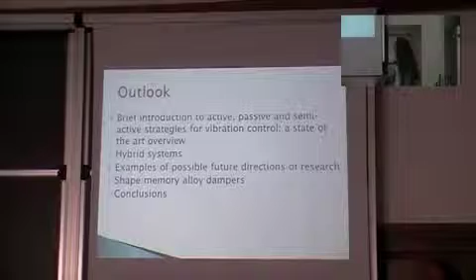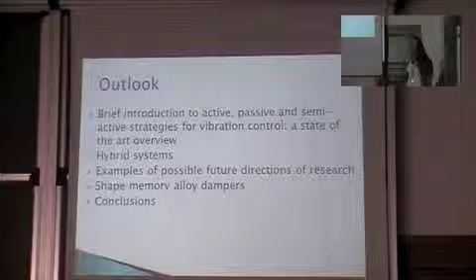Today's talk will be about recent studies of structural control of civil engineering structures. I conceived this lecture for a public from a wide background, so in 2 hours I didn't want to cover the entire state of the art on structural control, but rather focus on what the international community nowadays thinks are the most promising technologies for future developments. We'll start with a brief introduction distinguishing passive from active, semi-active and hybrid control, and among the literature we will select those which we think are more promising for development. We will emphasize the necessity of further studies in hybrid systems, which seem to combine the advantages and overcome the limitations of all the other types of structural control.

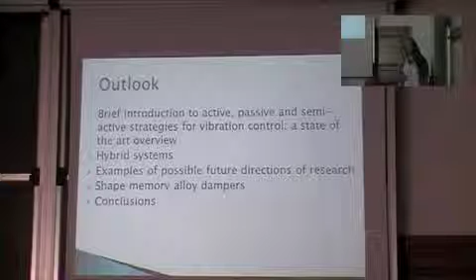My own background comes from material science, shape memory alloys. So I would devote particular attention toward the end, maybe in the second half of the talk, to introduce the topic of shape memory alloys. And we will end up with conclusions.

Given that vibration mitigation is a very broad topic which interests a lot of fields in engineering, we would like to stress the necessity to treat structural control for civil engineering apart from other disciplines, although we need to make the best out of the experience in other fields.

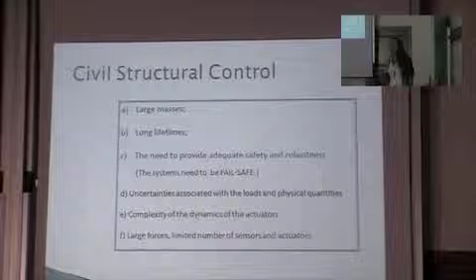The boundary conditions we need to deal with are quite peculiar, because we are dealing with very, very large masses, long lifetimes that are not comparable with the ones of structural control devices, which require a maintenance plan. We need to provide, in any case and any scenario, robustness and safety to our structures, which means that during maintenance the structures still need to be fail-safe — if one of these devices is out of order, we still need to rely on the robustness of the structure itself.

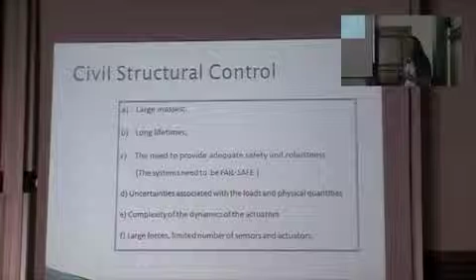Also, other concerns come from the lots of uncertainties that affect the loading condition and the physical quantities, which can be due, for example, to material damage and the state of the structure itself. Also, the dynamics of the actuators and its interaction with the structure is of concern, because there's always a delay between what comes from the actuator and what actually is received by the structure. This is still a problem to be discussed.

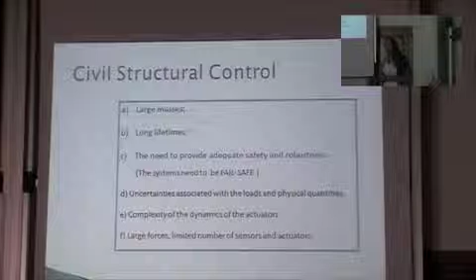Also, the location and limited number of sensors and actuators are a limitation due to the need of large forces. In the end, the baseline concept of civil structures is that they were conceived as passive structures, in the sense they are not adaptable, so we make design assumptions without actually knowing which ones are going to be the loads. So the intent here is to add devices to the structure, to change the structural configuration, the structural properties, in order to have a better response through the addition of devices.

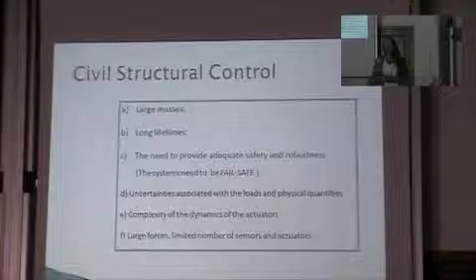Devices can be of different types, and they can be active if we are actually exerting a force, a control force, on the structure — which however has the big drawback that it needs external power. When exceptional loads occur, the first thing we do is run out of current. So we need to make up for this.

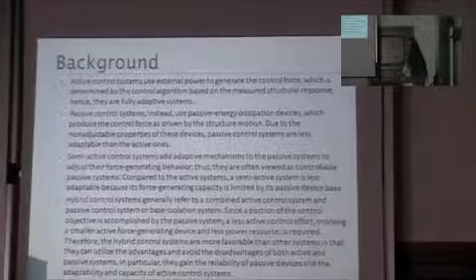Passive control instead uses energy dissipation devices which produce the control force as driven by the structure motion, so of course they're less adaptable. A good compromise is the semi-active control system, which is receiving a lot of attention lately. What they actually do is make passive devices adaptable, tuning the properties of the design device to make up for the recorded response. Finally, hybrid control is a step forward from semi-active because it combines both active and passive control systems, or base isolation.

The portion of control is accomplished by the passive system, so that we can always rely on that even if there is no power. It seems to be a promising way to merge the advantages of both worlds and overcome their limitations.

From a mathematical point of view, starting from the basic example of a single degree of freedom system, the structure is described by the equation of motion, and here we are assuming as the external force the ground acceleration due to earthquake. In general, this can be extended to any extraordinary loads during the structure's lifetime.

When the structure is controlled by a passive system, the passive system changes the structural response by adding a term, gamma x, which can take different forms - linear, integral, or differential. What makes this system passive is that this is decided by the designer and cannot be changed.

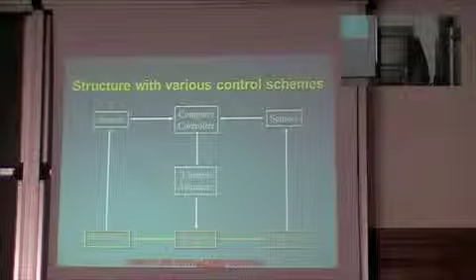So the problem of active control is an optimization problem, because we need to find the compromise between a better response and the cost of the active control device in terms of power and capabilities.

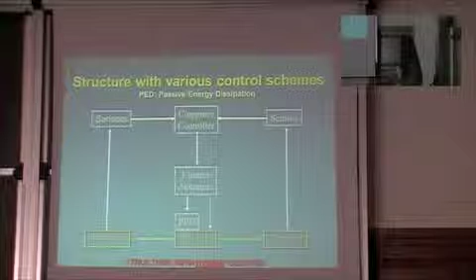The difference between what we call active control and hybrid control is that hybrid control also relies on passive devices. Passive devices that are integrated into the structure, changing its configuration, so that if the control actuators are not functioning, we can still rely on the passive part.

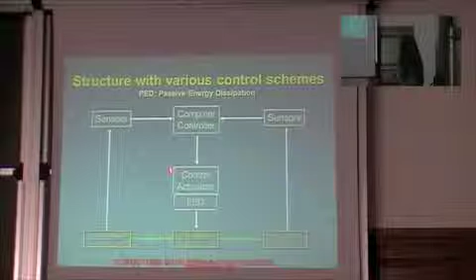What is the difference with the semi-active solution? The semi-active solution is when the passive energy dissipator is integrated in the controller and not into the structure. This is because the controller is used to tune the properties of the passive device in order to make it adaptive.

The passive device can also be an isolation system.

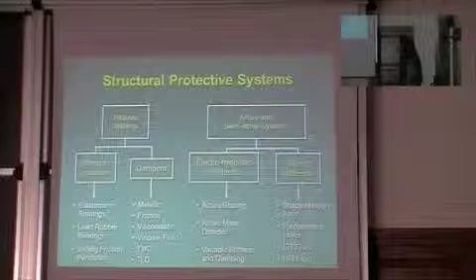To conclude this brief introduction, we have a summary of the protective systems that are nowadays in use in civil engineering. And if we want to also have a regional discussion of their use, unfortunately we have to establish that in Italy the only one that is mostly used is seismic isolation.

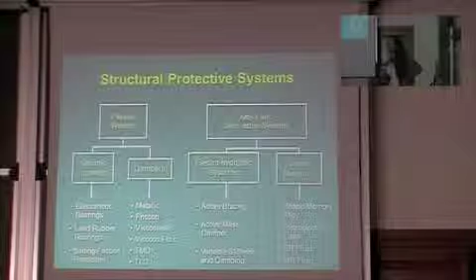Now, seismic isolation is passive and has the drawback that it is targeted only to the earthquake action. We want the structure to be adaptable to any kind of loads, but seismic isolation works only for earthquakes. Not only that, if you have to do seismic isolation on an existing structure, this is very expensive - you need excavation. It's effective though, because experience shows that after an earthquake, seismic isolation for structures worked well.

The other passive systems include dampers, which can work on different principles in order to dissipate energies. They can be metallic, friction, viscoelastic, or fluid dampers.

Among the active and semi-active solutions, we distinguish the purely active ones, based for example on active mass dampers, to smart materials, which are more in the semi-active area because they are materials with functional properties that can be tunable through providing electricity.

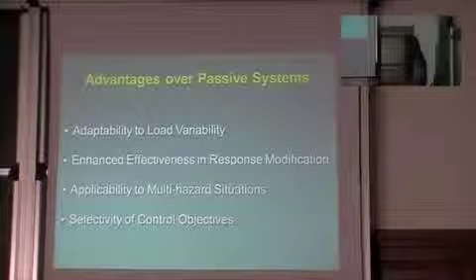The hybrid system is a combination of both the passive world and the semi-active or active one. It has the advantages of lower power requirement and potentially being fail-safe, whereas passive structural devices are more reliable but cannot adapt, while active systems rely on too large power inputs. So the advantages of hybrid systems over passive ones are adaptability, enhancing effectiveness in response modification, applicability to multi-hazards, not only earthquakes, and selectivity of the control objective.

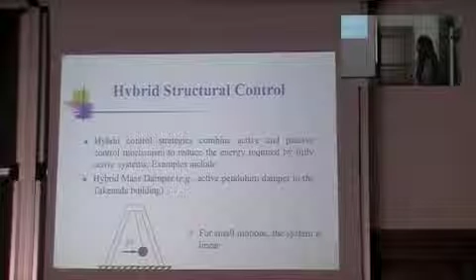Here are some examples from literature of hybrid systems, actually being implemented in real buildings in Japan. In terms of diffusion, in Italy we only have seismic isolation, or at most seismically isolated structures. But in Japan, actively protected buildings are of common use.

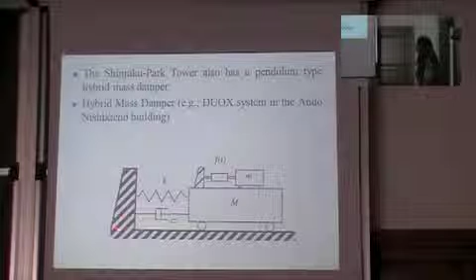This, for example, is a hybrid active pendulum in which the control force is used to drive the motion of the pendulum. Here is another hybrid system with a duox system, where we have an AMD on top of a passive element.

Another innovative device now being studied a lot is the so-called active isolator, in which you combine seismic isolation with some kind of active or semi-active dampers. Those are examples from the past.

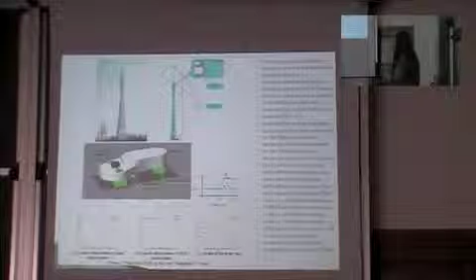A more recent one is the TV tower recently built in China, in Guangzhou, where a hybrid system was implemented. This is in a region very prone to typhoons, strong winds, so they equipped both the structure and the antenna with two different isolation systems based on hybrid control.

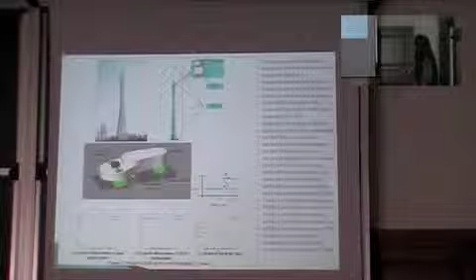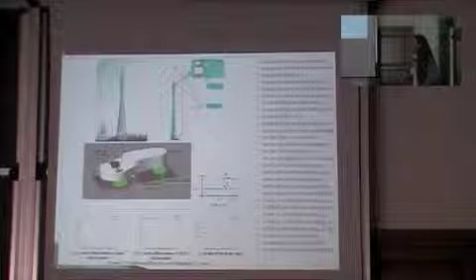This combines tuned mass dampers, which are columns full of liquid, but these have a limited stroke. This stroke enables the TMD devices to be reactive only to limited, weak wind velocities, low wind velocity. When there is a typhoon or stronger wind velocity, the active part of the structure comes along and provides for the missing capacity.

The problem with this solution, though - why is hybrid better? Because when there is loss of power, the actuators do not work. So in past earthquakes, in the Kobe earthquake, the actuators did not activate. And so we have to combine this with a passive solution.

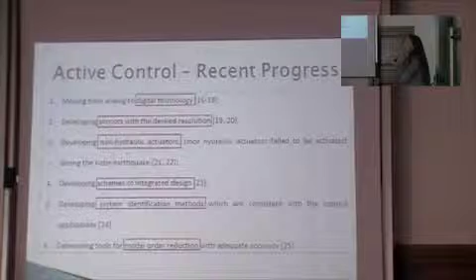We also had more studies pursuing integrated design between the devices and the structures, and system identification methods which need to work in large deformation, because active control, since it's expensive in terms of maintenance and power, needs to be activated only as the last resort, only when the earthquake strikes and we are in large displacement. So we need system identification methods that work for highly nonlinear structures, as we will see in a moment. Then there's also a need to develop model order reduction techniques for complex structural systems.

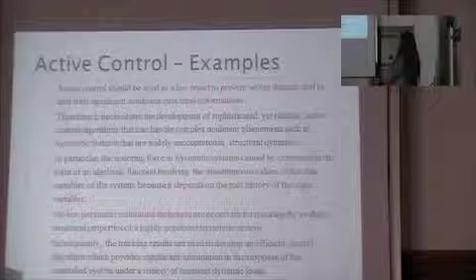So, an example of system identification technique that is realistically applicable during an emergency - we say it's the last resort during significant nonlinear deformation. During this deformation, the system usually shows highly nonlinear, hysteretic behavior. Hysteretic means that the restoring force is dependent on the past history of the state variables.

We need an online parameter estimation technique which tracks the evolving structural properties, and as output of this tracking technique we calculate the controlling force through an efficient control algorithm.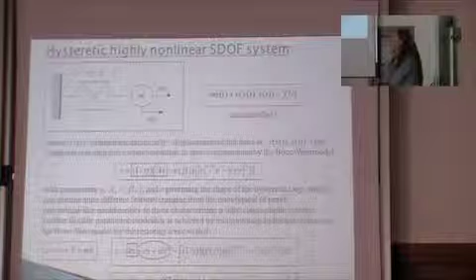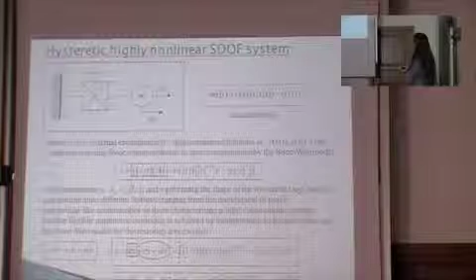If we want our model to become even more flexible and include larger classes of hysteretic systems, we can add to the restoring force, which we now call zeta, equal to r, given from the equation of motion by f minus m times the acceleration. We add to the terms that come from the integration in time of the Bouc-Wen model two other terms: one proportional to the velocity, and another proportional to the cube of the position.

So we introduce two further parameters to be identified. The objective of our tracking solution in time is to identify the vector of unknown parameters that describes our restoring force model.

We take the derivative in time, and we have the dependencies on the factor k, c, d. One notes that k came from the previous expression of the Bouc-Wen model because it just takes the place of 1 over eta times a, divided by a, so it's not a further parameter, whereas c and d are the newly introduced ones. Then we have the cluster of the remaining parameters and the exponent n.

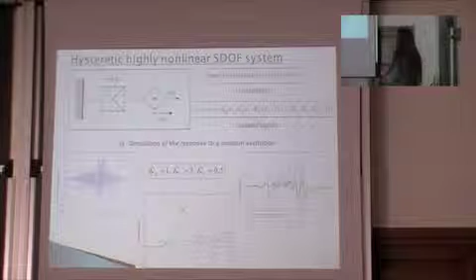Now we move from the academic case to the one that is more realistic, a random excitation, which could be representative of an earthquake or also ambient vibration. And in this case, the solution of the tracking parameters algorithms converge within the first 15 seconds of the excitation. And here we compare once again the response without the control force in blue, and the green one is when we activate the controller. So here was just to have an idea of the software, of the control law that we need in practical application.

But control is a multidisciplinary sector in which you also have to look at the hardware. And nowadays, as we were trying to summarize before, studies led to the development of wireless technology, which is very convenient in terms of installation and also, why not, sometimes also on performance.

But our controller needs to remain the same reliability as before. So we need to update our control system to give us the same results that we had when cables were utilized. So we did design this wireless sensing unit in this spirit.

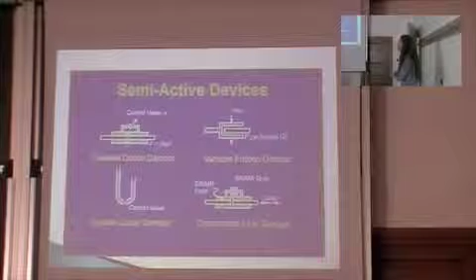Okay, so this is for active control. Let's move over to semi-active devices. Semi-active devices are receiving a lot of attention because, as we said, active control proved not to be reliable alone during earthquakes.

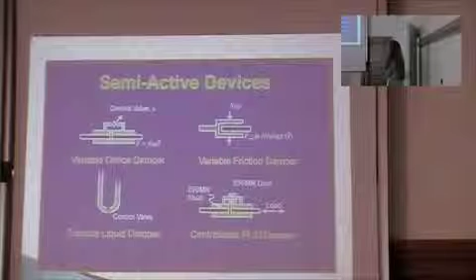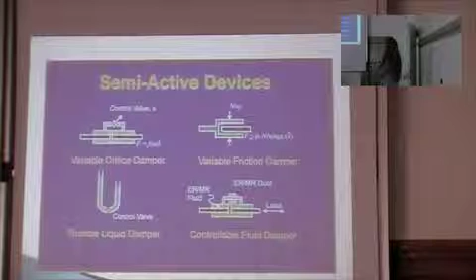And semi-active devices, the ones that are listed here are the traditional one from literature and are based on a valve. If this valve is open and the liquid or the material can go through, then we are tuning the properties of the device by varying its damping capacity. If the valve is closed, it's still a passive device. So the minimum performance you can get from a semi-active device is the passive one.

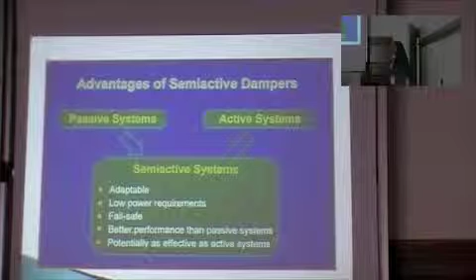With respect to the passive system, we have the advantage of being adaptable, having lower power requirements with respect to the active system, and being fail-safe, because if the active device fails, there's still the passive one working, providing better performance than a purely passive system, but potentially also reaching the performance of a fully active system.

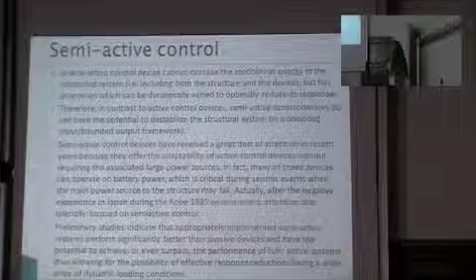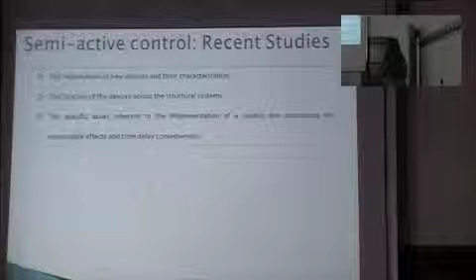What are recent studies focused on? The adoption of semi-active devices has a lot of advantages, but they're basically nonlinear devices, so you're adding nonlinearities to your structures. You need to characterize these devices from a structure-device interaction point of view. Not only do we have to discuss the location of the devices across the structure, but also the issues inherent to the control law, which is used to tune their properties in order to avoid possible delays. The advantage is we're not adding any mechanical energy to the system, so it's not going to become unstable because of these devices.

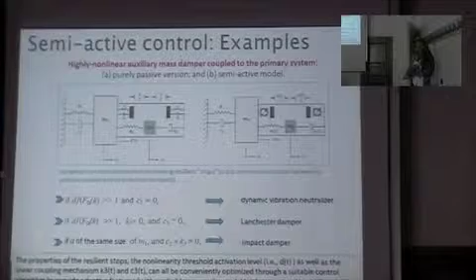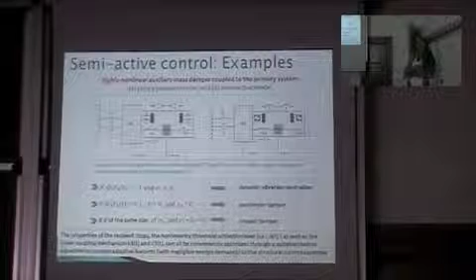Depending on the parameters we're using, we can classify them into different devices. If the secondary system is connected to the other one through only a spring but no damping, it's called a dynamic vibration neutralizer. If instead there is no spring between the primary and secondary system, we have the Lanchester damper, in the case where the span over which the mass can relatively move is much larger than the displacement of the primary system. If this distance d is of the same size as the primary system's motion and there is no damping and no secondary stiffness, then we have the simple impact damper.

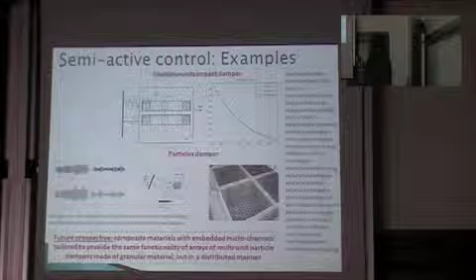What is the future perspective of this kind of damper? Let's move from a discrete granular material to a continuous one. How? By introducing advanced composite materials provided with microchannels tuned to give us the same functionality as the particle system. This is current research going on nowadays at the University of California.

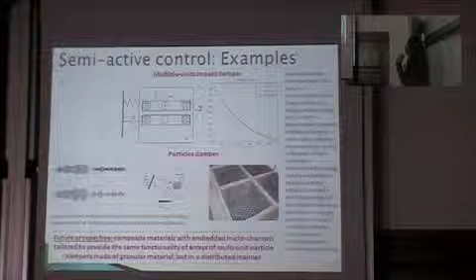Another example of promising semi-active device being deployed intensively in Asian countries is the magnetorheological type. They're called smart material because we can tune the properties by varying an electrical field, or in this case the magnetic field. By adding magnetic field, we increase the capacity of damping, of dissipating energy. They can be installed either on stay cables of bridges to counteract wind forces, or as braces in buildings for earthquake protection.

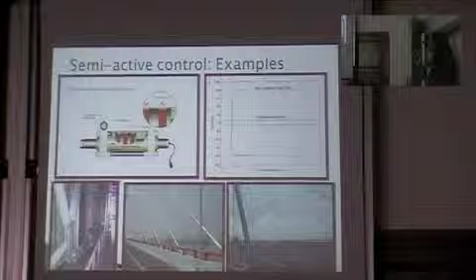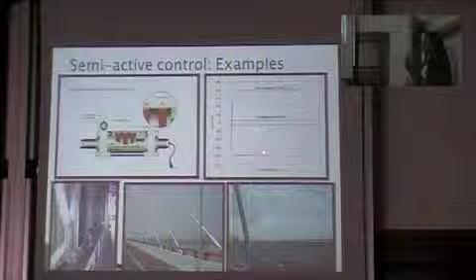But my main expertise is on another kind of smart material, which is shape memory alloy. What we push to do is the same type of application as magnetorheological dampers, but with shape memory alloys. With magnetorheological dampers, the key feature is to change the magnetic field in order to increase the damping capacity.

Shape memory alloy works by changing the transition phase, transitioning between one solid state and another. How? By either imposing a temperature gradient or imposing a mechanical stress. Sometimes when we talk about shape memory alloy, everybody thinks about the shape memory effect. This is one of the possible functional properties you can exploit, and it's used only for applications of actuation type. So people automatically associate shape memory alloys with actuators, active control.

The application I'd like to talk about instead is the equivalent of the magnetorheological damper - a damping device. It's based on the superelastic properties, which are shown in a different range of stress and temperature with respect to the shape memory effect. So the shape memory effect consists of...

Briefly, for an introduction to shape memory alloy: the two fundamental states, called parent state or austenite, and the martensite state, are achieved at different levels of temperature and stress. The difference is that the parent austenite is rigid and well organized in cubic form. Instead, the martensite is more like a plastic deformation and can be oriented or not, depending on whether we're working at low or high level of stress.

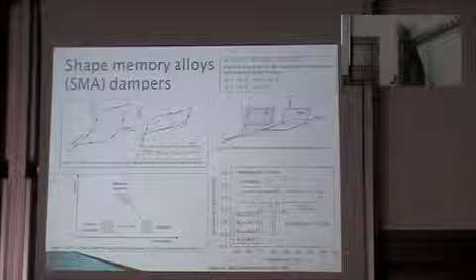So the first thing we need to do is choose the alloy composition. The most utilized alloy is the one based on nickel titanium, which offers some very advantageous properties, such as a very long fatigue life.

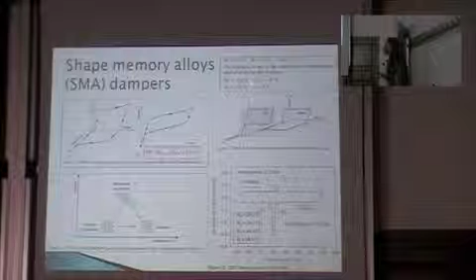This durability comes with no corrosion, but on the other side, nickel titanium has a narrow austenite window at high temperature. So we did not limit ourselves to nickel titanium, but also considered copper-based alloys such as aluminium-beryllium-copper, which have an austenite temperature range more suitable for civil engineering applications, comprised between -20 and +2 degrees. On the other side, their fatigue life is lower and they can corrode.

So the early studies were based on nickel titanium alloys, carried out within an FP5 project around 2001. The alloy was used to sew together masonry blocks of very ancient monuments.

The intent of this research project was cultural heritage preservation, and one of the most interesting case studies was the preservation of the Luxor Memnon Colossi in Egypt. You can see how they lie in a degraded state, with the basement affected by passing cracks.

The idea here was to sew together the cracks with shape memory alloy wire so that we limit the relative displacement during an earthquake. But at the same time, we don't add too much stiffness, like we would with iron, while we still enable dissipation of energy.

The model was schematized by finite element, where the cracks were included by modeling a contact problem. Here is shown the relative displacement of two nodes at opposite edges of the cracks, with and without a link of a wire having the constitutive law of a bilinear nickel-titanium shape memory alloy. We see how the relative displacement with the addition of this device is limited compared to the case without it.

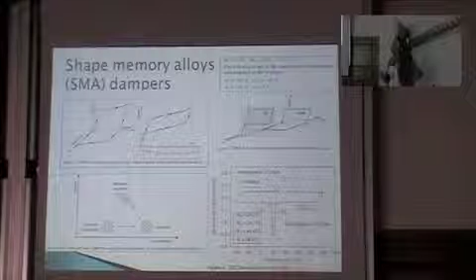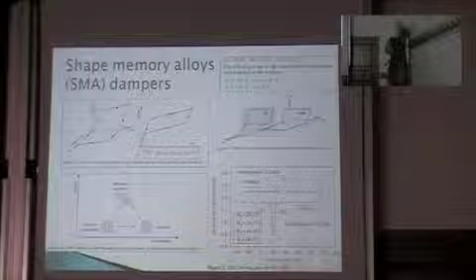But we have the drawback that nickel-titanium only works within this austenite window, which is not very suitable, especially in the desert, which has very big temperature gradients from night to day. So we moved to study the behavior of copper-based alloys, which have a better austenite window in which we can exploit the superelastic properties.

Now we move to the same model structure we used for our active control test, and we mounted copper-based wires as braces on the first floor. We compared the response without braces, and also by replacing the shape memory alloy braces with steel ones. Here are the results with steel braces, and here with the shape memory alloy. You see how we have not only a better damper, but also higher reduction capabilities.

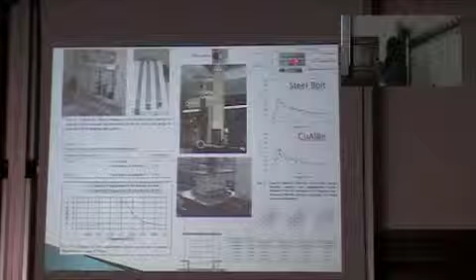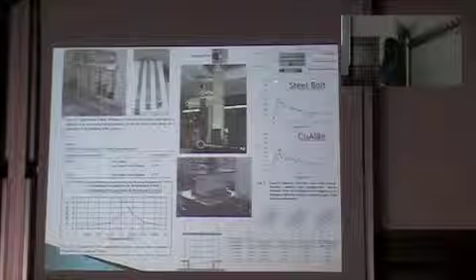We repeated this using both steel bolts and shape memory alloy bolts, and compared the results. With steel bolts, the frequency in the forward and backward test is the same, whereas you can see a clear shift when you introduce the shape memory alloy bolt. These studies also need to take into account the impacts between the hosting hole and the shape memory alloy device itself.

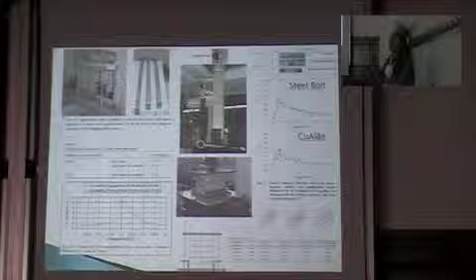Moving to more practical application, the original devices were targeted to monuments. Monuments can always be assumed to be an assemblage of stones. So in order to model the capacity of holding these stones together with shape memory alloy wires, we mounted a specimen of masonry where the masonry is loosened, so we have nonlinearities geometrically introduced by the lack of connectivity between the bricks.

We repeated the shaking table test on the loosened bricks, which are held together only by the compressive force of the plate at top. Then we introduced the shape memory alloy wires between the top and bottom plates, and we analyzed the results also from a numerical point of view.

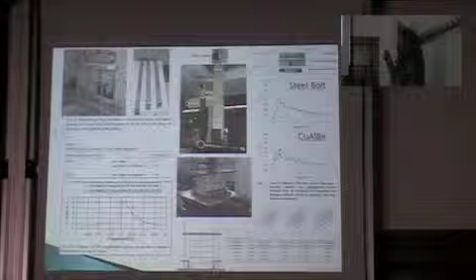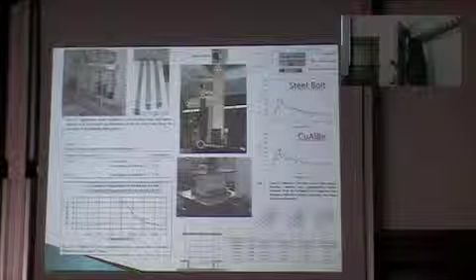We want to understand how we can model the structure, including the shape memory alloy device, without changing the dynamic response of the structure, by actually representing the experimental results. So how do we obtain, for example, the same frequencies and the same maximum displacement that we obtain from our shaking table test?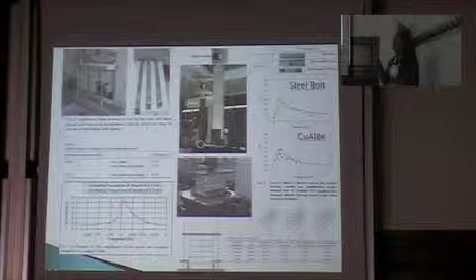This is a preliminary study for designing our intervention retrofit on monuments, because once we establish how to model numerically our devices, we can design how many devices we need and where they need to be located without having to run overly expensive analysis.

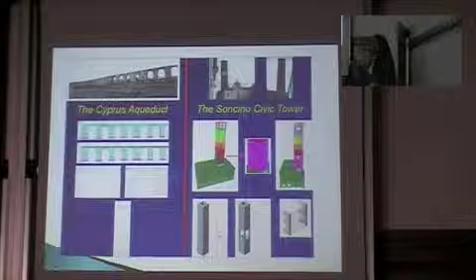Here are two other case studies. One is the Cyprus Aqueduct, where they actually implemented the retrofitting, and it's still there and being monitored, with students still analyzing the measurements of the retrofitted aqueduct.

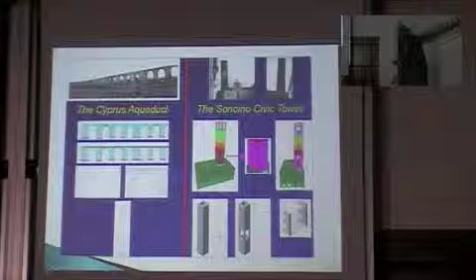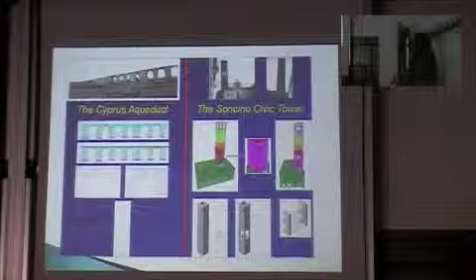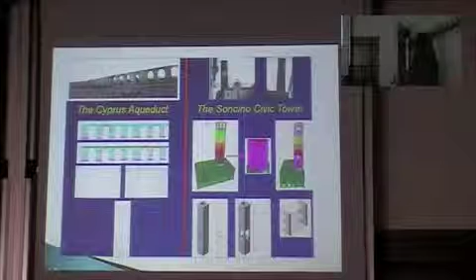The Civic Tower of Soncino instead was the object of a monitoring campaign. It has not been retrofitted and is still affected by pretty serious cracks. But there was at least a proposal of retrofit where these devices were to be inserted where major damage was caused by the passing cracks, and we see how the experimental results once again could match the numerical ones.

Another application more similar to metallurgical devices are the braces in steel frames, which are also modeled numerically and experimentally. The braces in shape memory alloy really have a significant damping effect and enable, in this case, a reduction in the amplitude of the oscillation, dropping from 1.5 to 0.3.

This is the mounting device, because in order to achieve the superelastic behavior, you need to reach the plateau, which means you have to go over the initial elastic phase. To reach the plateau, which also means you can recenter your device, you need to give it an initial pre-stress. This is the device we use in order to install and give the pre-stress.

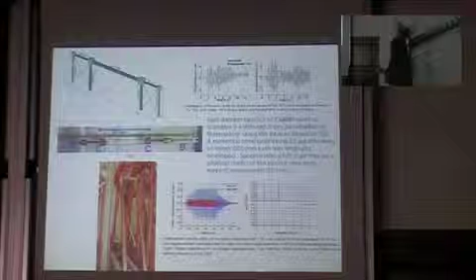So this one was a seismic application. Here is the application for cable stays in bridges, which has different requirements because the problem is very different. The number of cycles the structure needs to survive in this kind of application, the fatigue life, must be much longer than for an earthquake. But on the other side, the deformation levels you're working with are much lower, so you can still survive 1 million cycles with this device using the entire fatigue life.

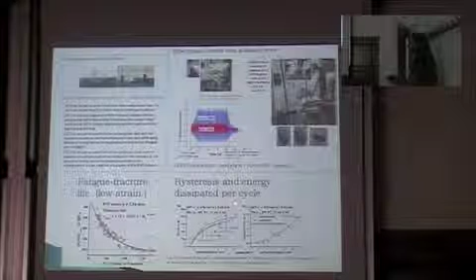Also notice you cannot rely anymore on the large entire cycle that you had for the earthquake case, because in an earthquake the maximum deformation here is around 8%, so you're relying on a bigger cycle. Here, in the wind application, the deformation is about 2% or lower, so you can rely on a smaller energy dissipation capacity.

Here is a plot that shows how the energy varies with the deformation in millimeters, the elongation to be precise. This is a small-scale experiment being conducted at our laboratory, in which we have a tiny steel cable with distributed lumped mass along it, and we applied the shape memory alloy device coupled to it, next to the excitation. These are the experimental results.

We are now working on the numerical part because it's not very straightforward to model the phenomenon of interaction between these concentrated masses and the cable itself, as there is also interaction within the cable. But the main issue we are addressing with this reduced scale experiment is to understand the scalability of the results, because what we obtain here are for reduced scale spacing.

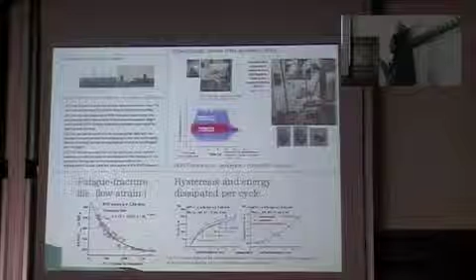How can our laboratory results be extended to realistic results of a cable of real size, which has a length of 50 meters and a diameter of 50 centimeters, compared to our laboratory specimen of before? Why do we want to do that? Because we are creating virtual laboratories in which we want to perform as many inexpensive experiments on laboratory scale and be able to extend them to the real world. So we have to compare the scalability of the results.

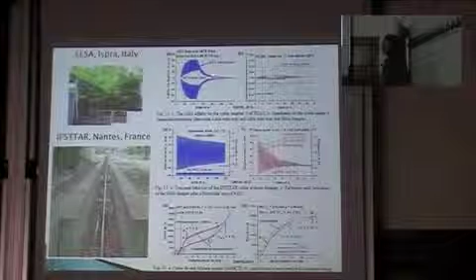These are the results obtained from a bigger facility, the JRC in Ispra in Varese, where you can see that even when there is no shape memory alloy device inserted, there is strong damping, which is not typical of cables, because usually cables have no damping at all. Why is that? Because these cables are full of wax, so they are already dampened.

Instead, a cable which is not full of wax, so it has no damping, is the one in IFSTTAR Nantes, the LCPC. And you can see how there is no natural damping occurring here.

Now, when we add excitation, for example here was a sinusoidal external excitation, and here was a Heaviside function, an impulse function that we exerted on the cable. We see how the insertion of the smart damper can reduce the amplitudes and add damping to the structure. But the most interesting result: before we were working at a deformation level of 8%, typical of earthquake engineering.

Here we're working at a lower level of deformation. At lower levels of deformation, we obtain numerical results that are more similar to the experimental ones when we do not adopt the bilinear model. The bilinear model gives very good results for earthquake engineering, and that's the one we typically adopt for the uniaxial case of shape memory alloy, that is, a wire.

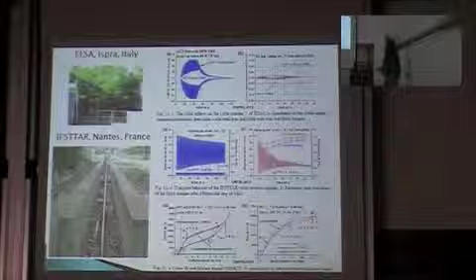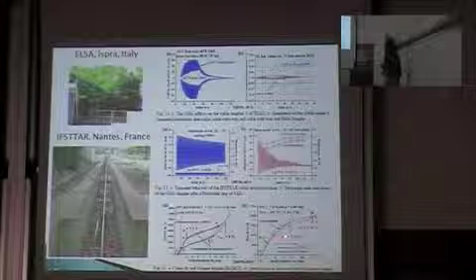But when we use a lower level of deformation, to obtain good agreement with the experimental results, it's better to go with a cubic fit. In this case, we can actually obtain the realistic energy dissipation capacity of the device. Instead, if we rely on the bilinear model, we overestimate our damping capacity.

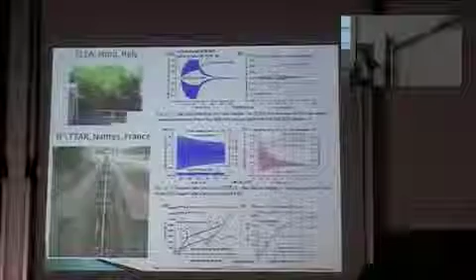My presentation covered a brief overview of recent studies in control. Rather than pursuing an extended state-of-the-art, which was not feasible in a couple of hours, we focused on particular cases that are judged promising for future development and future research. We invite anyone interested in the topic to submit a journal article and participate in a conference.

The next one will be the World Conference on Structural Control, to be held in Barcelona in 2014, on July 15-17. Here is our new president from this year, not only of the European Society but also the international one, because Professor Fujino just passed over the precedence to him. So for the coming four years, Europe will lead both the international and the European community on structural control under the auspices of Professor Rodellar.